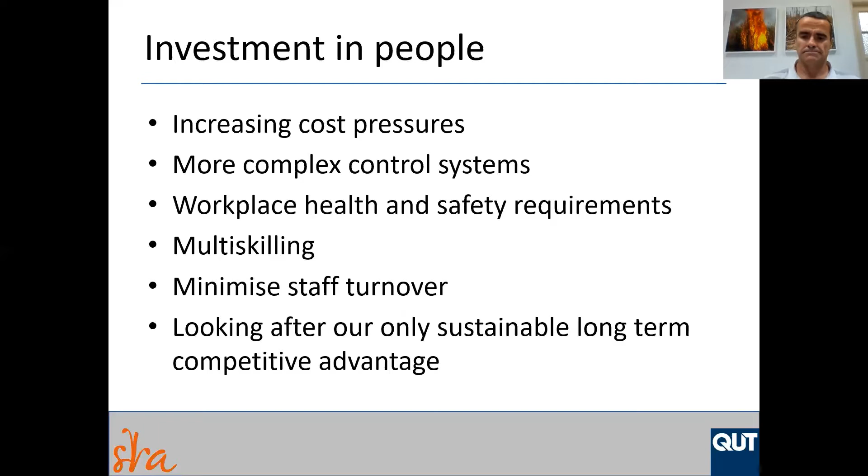The boiler station is probably the most important part of the sugar factory, because most factory operations require steam, and steam is produced by the boiler station.

However, when you have factory disruptions, they disrupt the boiler station. And conversely, when you have boiler station disruptions, they affect the factory and therefore production. So boiler operators are one of the most important group of people in the sugar factory, and the competence of boiler operators is absolutely essential.

Boiler operators require a steam ticket before they're allowed to operate at the boilers. But as any operator would tell you, the steam ticket is only a first step on the path to becoming a competent operator. Traditionally, the industry has relied on on-the-job training, mentoring, or a buddy system, so operators learn from their colleagues.

Part of the learning process is operators being thrown in the deep end, learning by experience, doing it themselves when they're the only one on site, or the only one at that particular time, and they have to make a decision with no one else around.

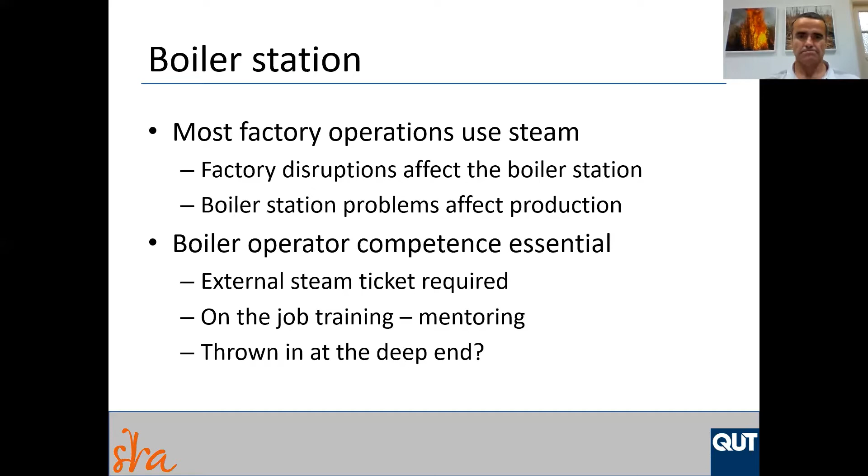The drivers for this project, developing a boiler simulator, were some recent well-publicised incidents, some of which cost in excess of $10 million for repairs and lost production. Whenever you make a major claim, insurance costs will undoubtedly increase, and you get greater external scrutiny, especially from regulators.

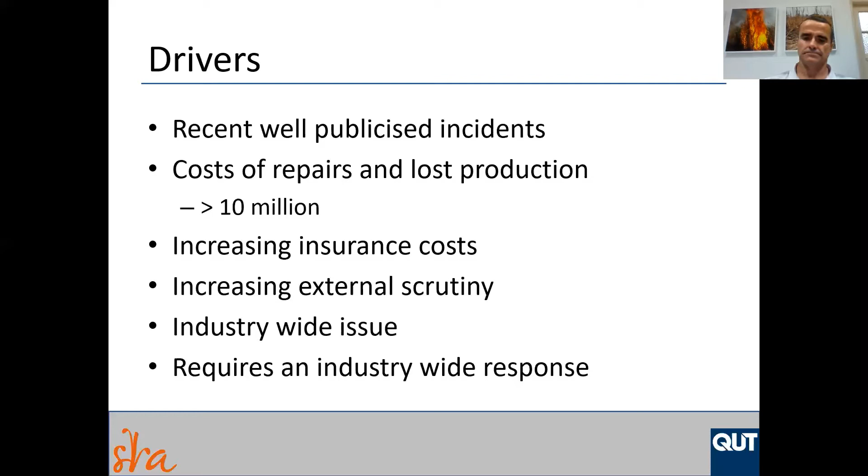These incidents in the boiler stations are an industry-wide issue, and therefore require an industry-wide response. So what are some of the things that can go wrong in the boiler station?

Some of the critical things that have contributed to previous incidents are boiler drum level issues. If the boiler drum level gets too low, you can overheat your boiler and severely damage it. If your drum level gets too high, you can cause carryover of water droplets into the superheater tubes, causing failures of the superheater tubes, or water droplets carried over into the factory turbines causing failures of the turbines.

You can also get steam pressure fluctuations, which can cause turbine trips and therefore factory stoppages. In the boiler station, you also have issues with instrumentation and equipment failure, and other issues associated with puffs or explosions, resulting from unstable combustion during normal operation or startup problems.

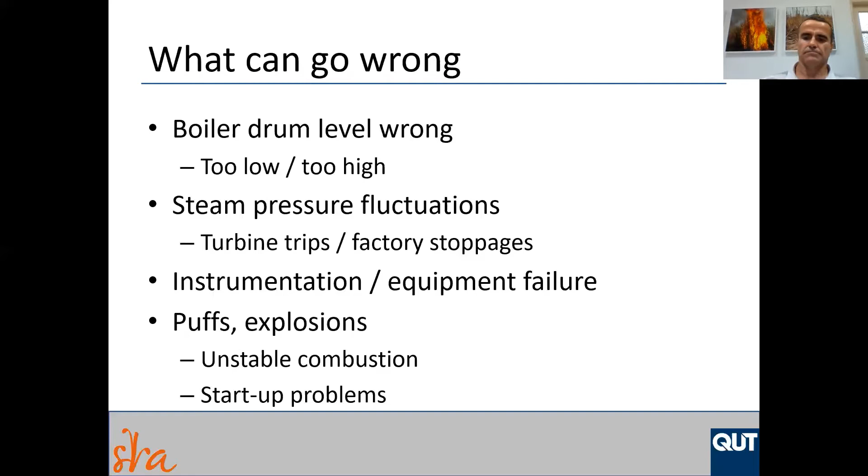This photo shows the consequence of a boiler explosion. Here we've got an electrostatic precipitator being knocked over, due to a boiler explosion, and this boiler explosion was partly attributed to operator error.

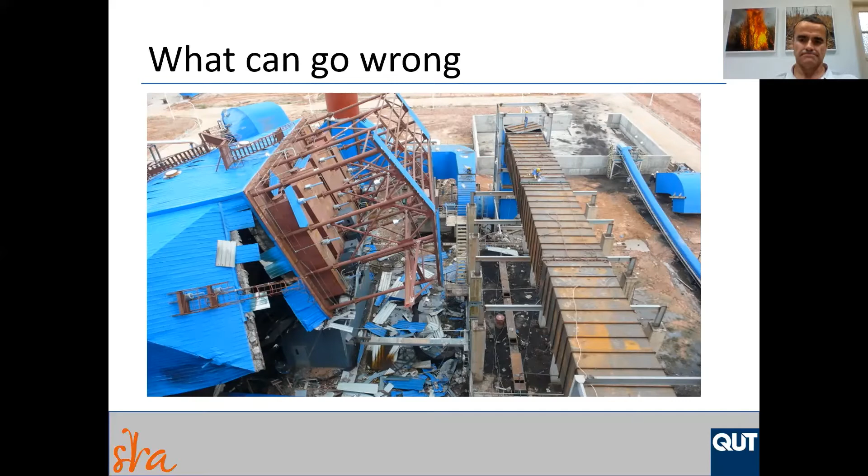So the industry response to these issues is multifaceted. Firstly, the industry has been developing standard operating procedures for the boiler station. The industry is also developing more formalised operator training processes, and looking at training simulators. That is basically this current project. A really encouraging aspect of this project is that we've been able to get input from all milling companies.

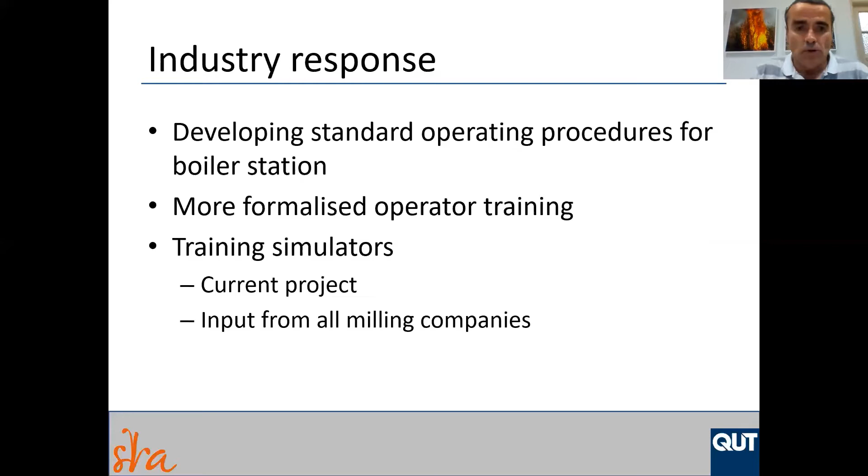Some of the training simulator options that have been looked at: the first and fanciest is the site-specific or replica simulator. In this site-specific replica simulator, the processes are simulated and the human-machine interface is identical to the distributed control system that the operators would normally see. This type of simulator is ideal for replicating the plant response and also for training operators with the human-machine interface.

However, the site-specific replica simulator is very high cost, well over $1 million. Another disadvantage is that when you change the DCS, which often happens when new equipment is installed, the simulator has to be upgraded, which entails extra costs.

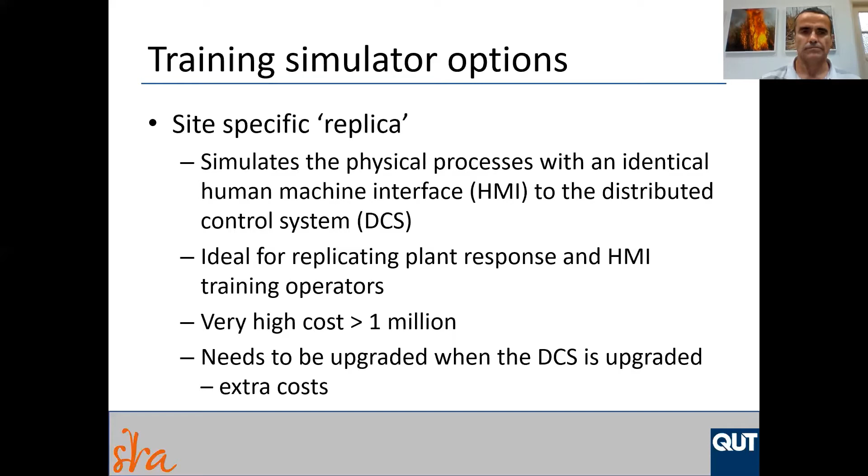Another type of simulator is the type-specific, operated by a company called Costex Systems. This type-specific simulator has a similar back-end to a replica simulator, but the human-machine interface is similar to the DCS interface, though not identical. These type-specific simulators are around a quarter of the cost of the site-specific replica simulator.

An example of the site-specific replica simulator is at Tarong Power Station, and Millmerran Power Station has a type-specific simulator.

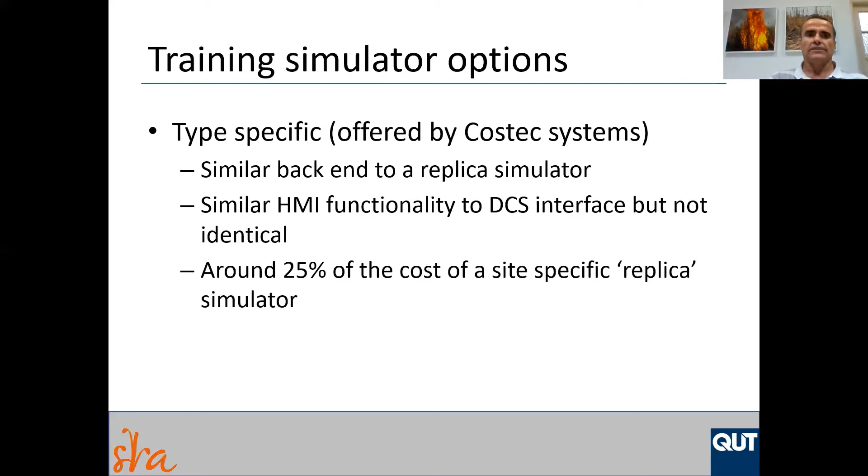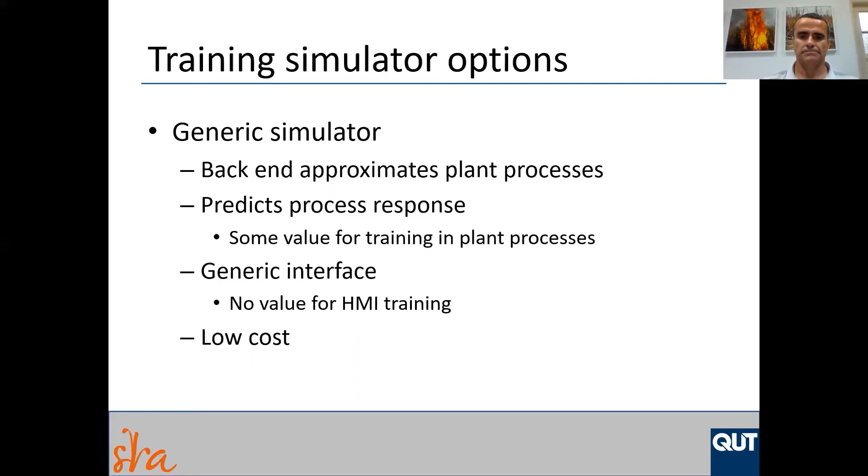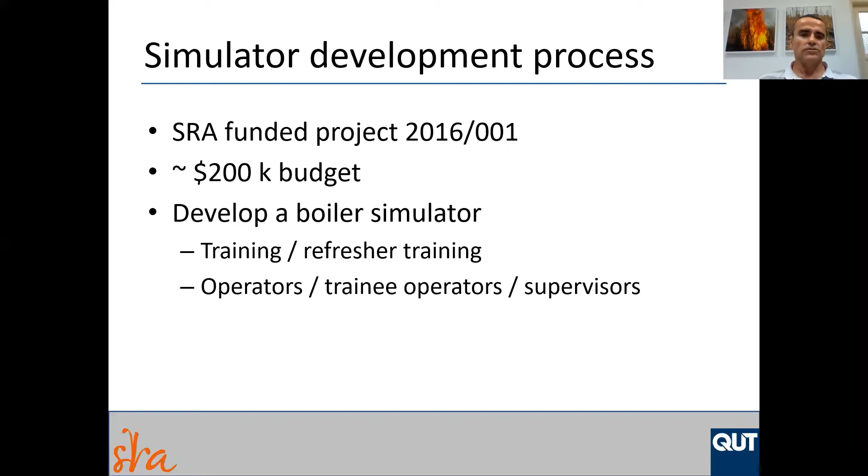This project, which was just recently completed last year, was funded by SRA and started in the middle of 2016, with a budget of around $200,000. The idea of the project is to develop a simulator that can be used for operator training and refresher training, not just for operators, but for supervisors as well.

The simulator development process consisted of quite a few stages. At the start of the project we had surveys of boiler operators and an industry survey, generally of chief engineers, production managers and factory managers. Then we had an industry workshop hosted by Mackay Sugar at Pleystowe Sugar Mill.

The fourth stage of the process was when we developed all the simulator submodels. Following that, we combined those submodels into a back end for the simulator, and then afterwards developed a front end for the generic simulator.

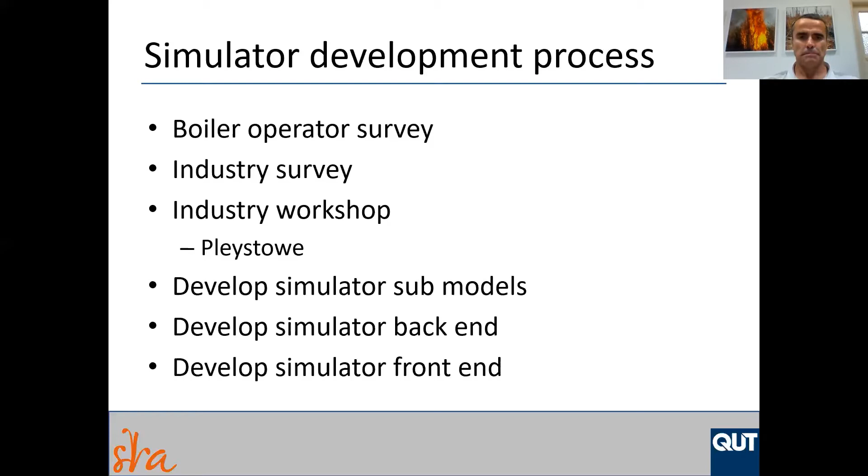After developing the front end, we had an initial demonstration of the simulator at the Wilmar Townsville office, which was a very useful session because Wilmar have a fair bit of experience with simulators for boilers, pans and other parts of the factory. They provided some very good feedback, which was incorporated into the simulator.

Then at the final stage of the project, early last year, we had a demonstration of the simulator at Millaquin Mill.

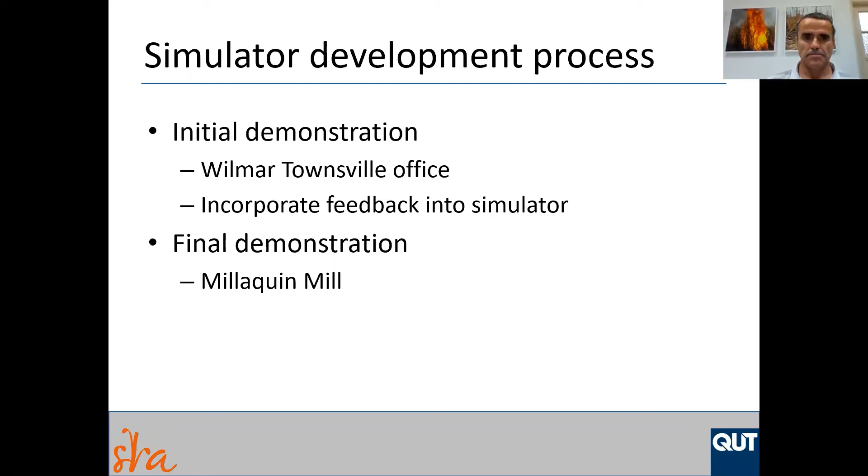This generic simulator developed in the project has a back end based on submodels that are physically based. These submodels were written and tested in Visual Basic.

The Visual Basic models were then transferred into SysCAD, which is a process simulation package with a macro or module language called PGM, and the VB was incorporated into SysCAD.

SysCAD supplies steam and water properties, controller functionality, and equation solvers.

Furthermore, SysCAD also provides a generic front end for the simulator, and this generic front end can be customised based on feedback.

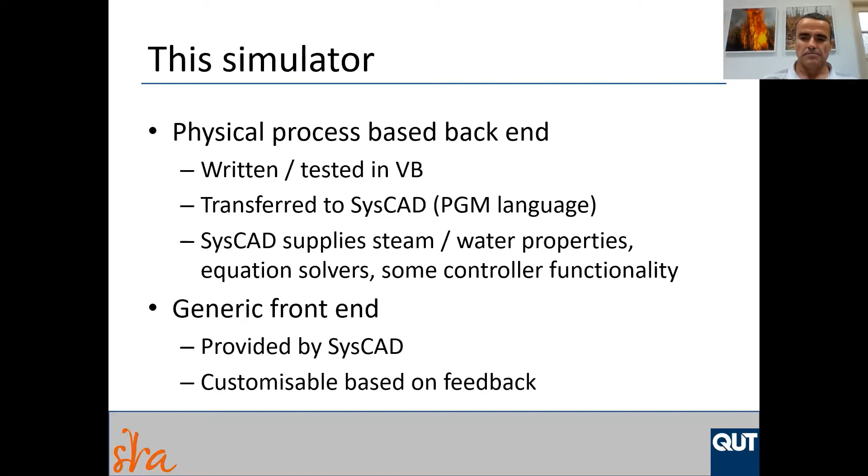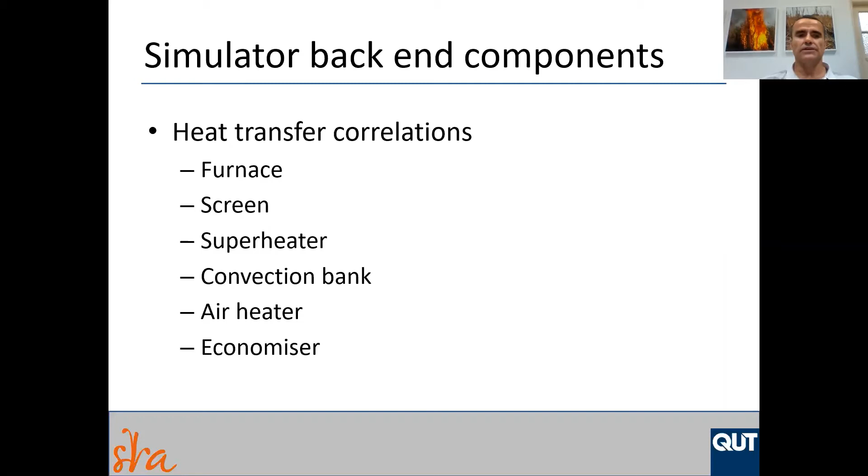The back-end components, or submodels, of the simulator back-end include heat transfer correlations for the various parts of the boiler, including the furnace, screen, superheater, convection bank, air heater, and economiser.

The back end also includes models that simulate the gas, air, water and steam systems, taking into account fan and pump curves for dampers and control valves, and correlations for pressure drop in the grate and dust collector.

Also included are relationships for stack effect, flow inside the tubes, flow through the tube banks, and models of the steam drum.

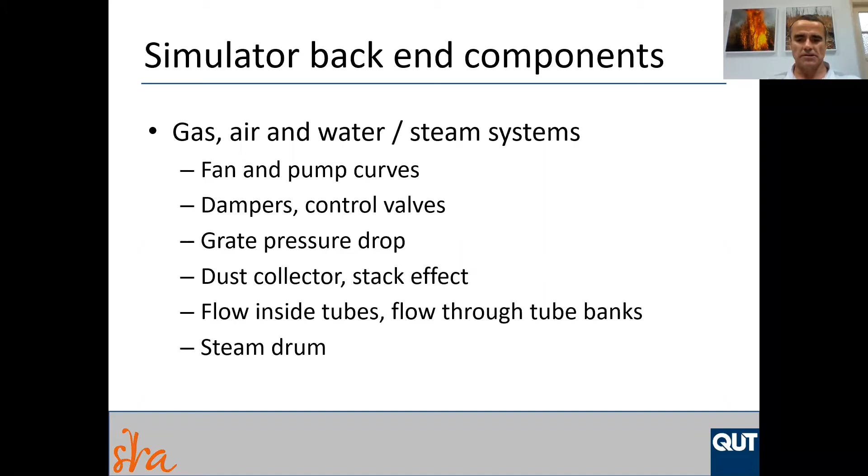So they're very important for the simulator back end to predict swell and shrink of the drum. Basically, that is the rise and the fall of the water level in the boiler steam drum. Swell is when the water level in the steam drum rises.

That occurs when the steam flow leaving the drum is greater than the net steam flow in the boiler. So what happened in the boiler? The steam is produced in the furnace tubes, screen tubes, convection bank tubes, and there's also condensation in the drum, which supplies the energy for heating the feed water up to the drum temperature. So when you have swell, the steam flow leaving the drum is more than the net rate of steam generation.

That causes the pressure in the drum to reduce, the density of the steam reduces, and that means the bubbles below the water level expand, and that causes the water level in the drum to rise.

Shrink is the opposite effect. Basically, when the steam flow leaving the drum is less than the net steam generation in the boiler, the opposite happens. The pressure in the drum increases, the steam density increases, and therefore the bubbles underneath the water reduce in size and the water level falls.

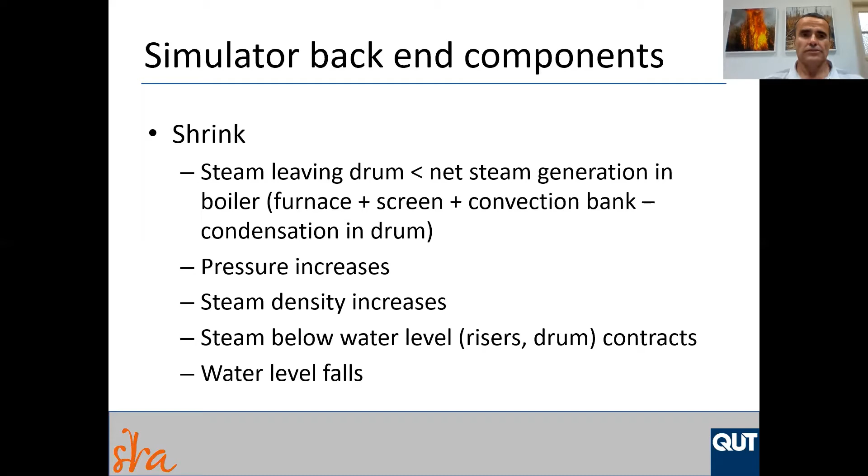So swell is the issue that can cause failure of the superheater tubes and failure of the turbines. Shrink is what happens when your boiler level goes down and your boiler tubes can cook because there's no water in them to keep them cool.

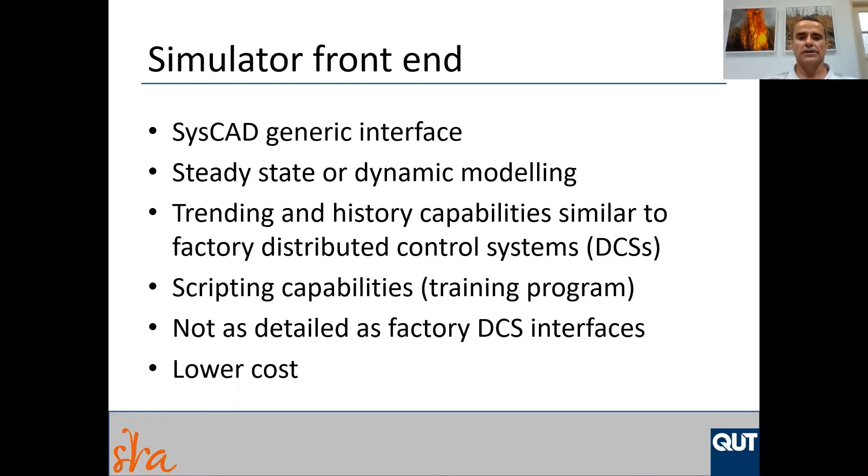The front end of the simulator uses the SysCAD plant simulation software for the generic interface. It can carry out steady state or dynamic modelling, and it also has trending capabilities similar to the distributed control system trends. You can write scripts in SysCAD, and they can be used in a training program. The interface isn't as detailed as the factory DCS interface, but it's significantly lower cost.

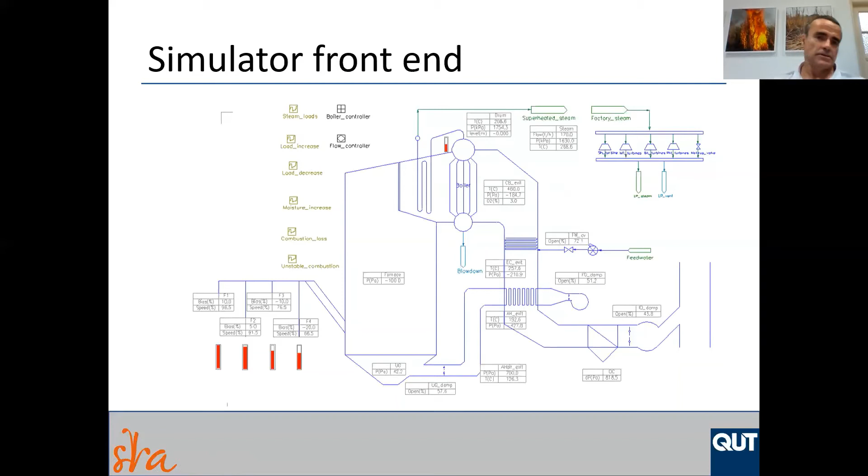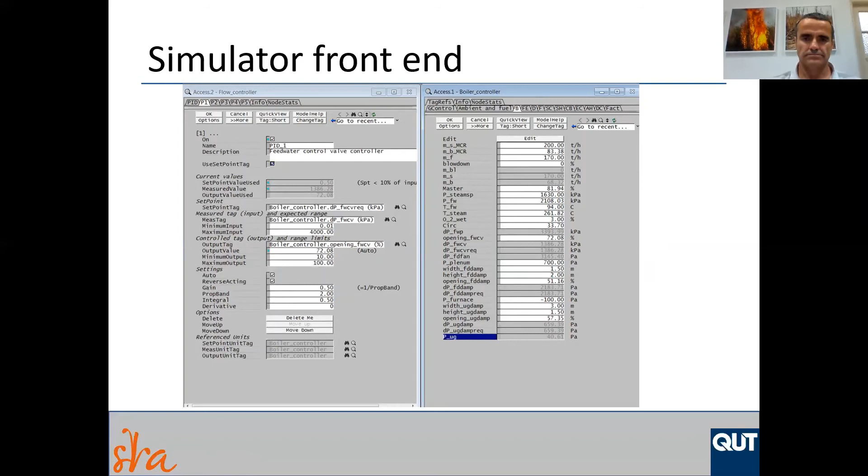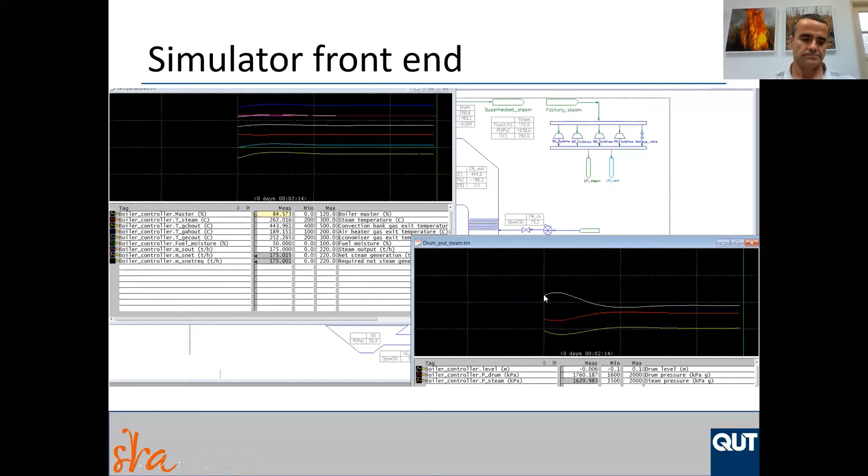The training program that was developed as part of the simulator was to help trainee operators with the response to various scenarios. In the training program developed in the project, we try to avoid the site-specific details and keep it very general.

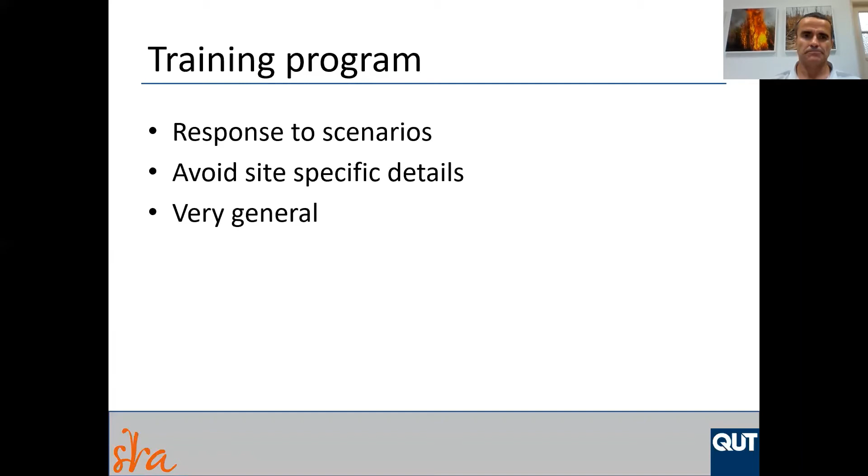Some of the scenarios included in the training program are the load swing. For example, a pan comes online, or the shredder steam demand increases due to the variety of cane, or we have a reduction in steam load, like a pan coming offline, or a factory stop.

Another scenario modelled in the training program is having wet fuel, and also included scenarios like loss of combustion and unstable combustion.

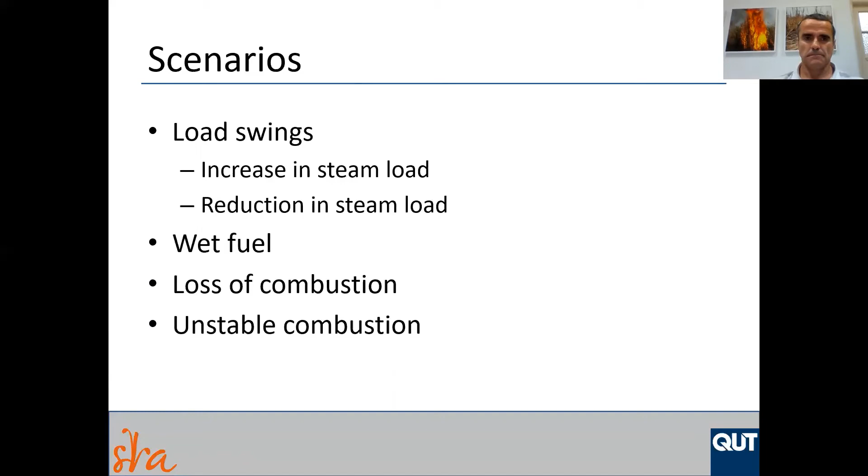Here we've got a little demonstration video of the load increase scenario. In this scenario, we've got a test boiler with a 200 tonne an hour maximum continuous rating steam load. The steam flow is starting off at 170 tonnes an hour and increasing in 3 tonne per hour increments. So we'll get this going.

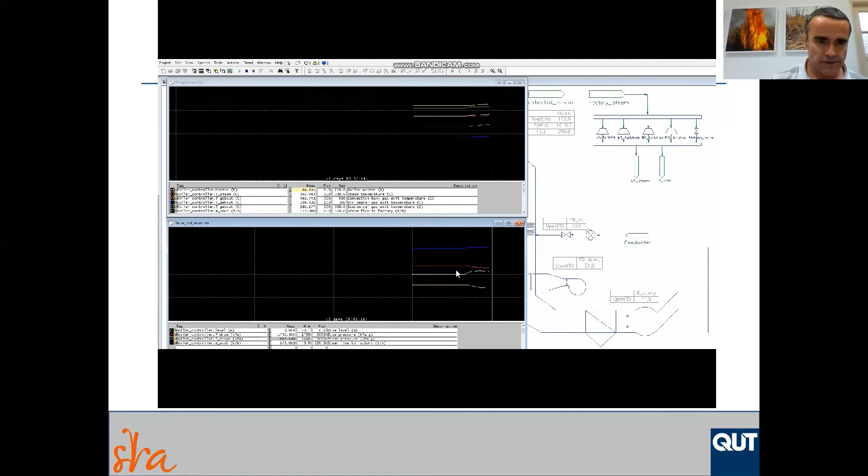In the bottom trends, we've got the drum level in white, steam pressure in yellow, drum pressure in red, and steam flow to the factory in dark blue.

So you can see just after we have a load increase, steam flow to the factory increases, the drum and steam pressure reduce, and the drum level increases.

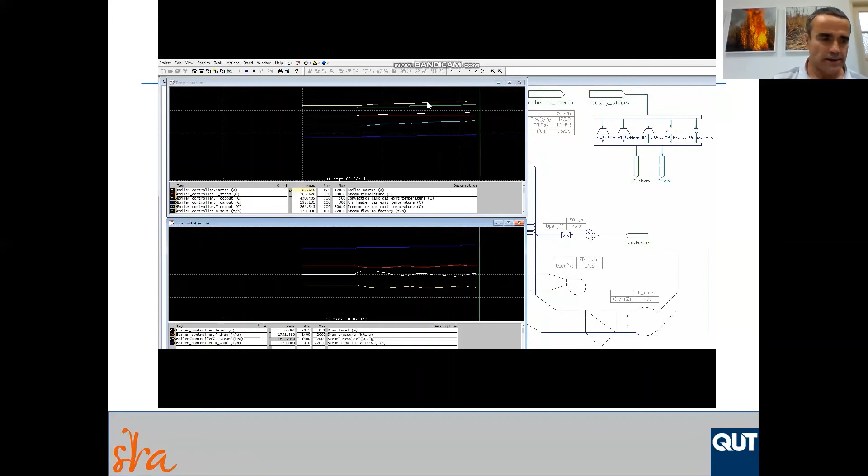As in the top trend, as the steam flow to the factory increases, the boiler master increases to maintain the steam pressure, and all the gas exit temperatures increase. Then on the next increment, the control system eventually sets the drum level back to its normal values.

Okay, thank you very much. This is just a final demonstration of the simulator. We'll also be talking about this at the ASSCT conference in Bundaberg in about over a month's time.

I'd like to acknowledge SRA for funding this work and the respondents to the boiler operator and industry surveys, and also the participants at all the workshops - the industry workshop hosted by Mackay Sugar, the initial demonstration hosted by Wilmar, and the final demonstration hosted by Bundaberg Sugar, and all the attendees at those workshops that supplied very useful input. I'd also like to acknowledge those companies: Mackay Sugar, Wilmar, Bundaberg Sugar.

Also like to acknowledge Mary Wang at KWA, Kenwalt - they're the suppliers of the SysCAD package. And also, last but not least, the ASMC People and Safety Committee that provided the initial driver for this work. Thank you.